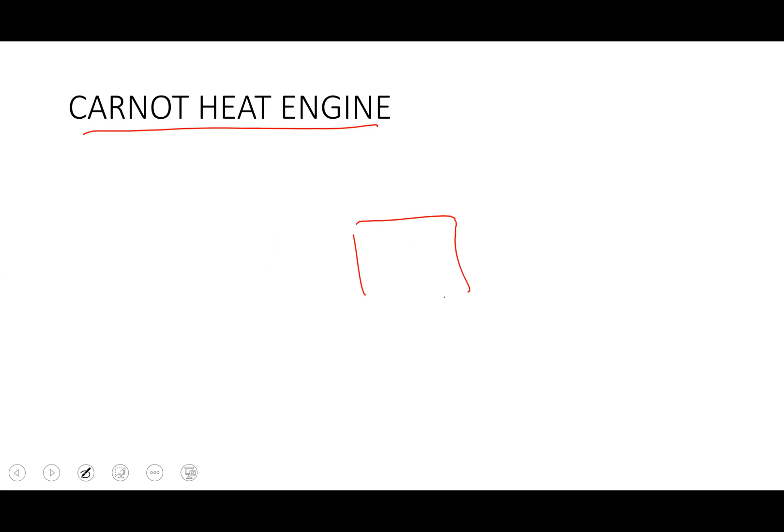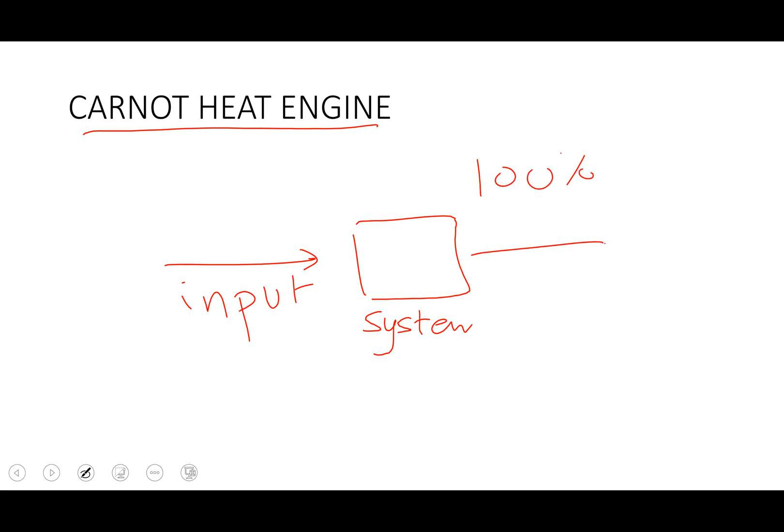A Carnot heat engine is basically a specific kind of engine in which whatever you put into the system as input, you get 100% as output, as useful work done. Such an ideal, or imaginary, engine is known as a Carnot engine.

Let us read about it. A heat engine is a closed system that exchanges only heat and work with its surroundings and operates in cycles. That means if this is a system, and we give heat to this system, it does two things: one is useful work done, and some of the heat is lost as heat loss, or friction, or heat sink.

All cyclic or heat engines derive heat from the heat source and convert some of it into useful work, which is this one, and reject the remainder to the heat sink, which is right over here.

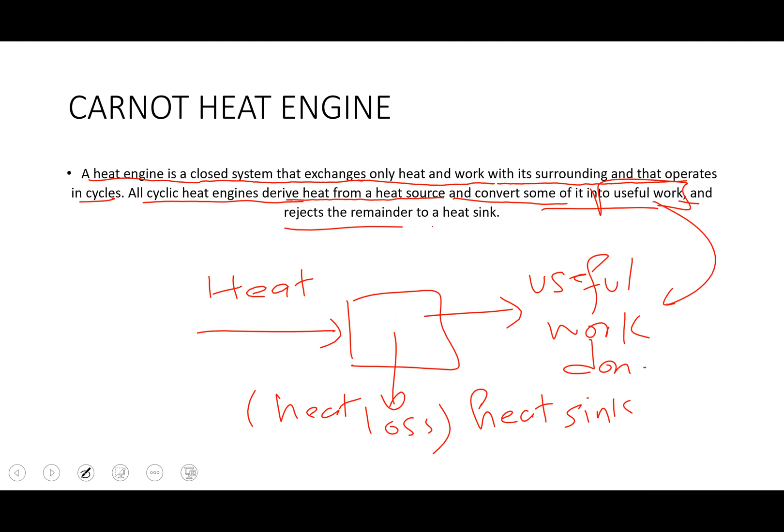As a matter of fact, all engines possess a dissipative effect. That means they will give off some heat due to friction, due to grinding between the materials inside it. Hence, the efficiency of the heat engine is reduced considerably.

In order to set an ultimate limit to the efficiency of the heat engine, a French military engineer named Sadi Carnot in 1824 considered a hypothetical, imaginary, idealized heat engine free from all sorts of heat loss and friction, which is called the Carnot heat engine. The efficiency of an actual engine is always less than the Carnot engine.

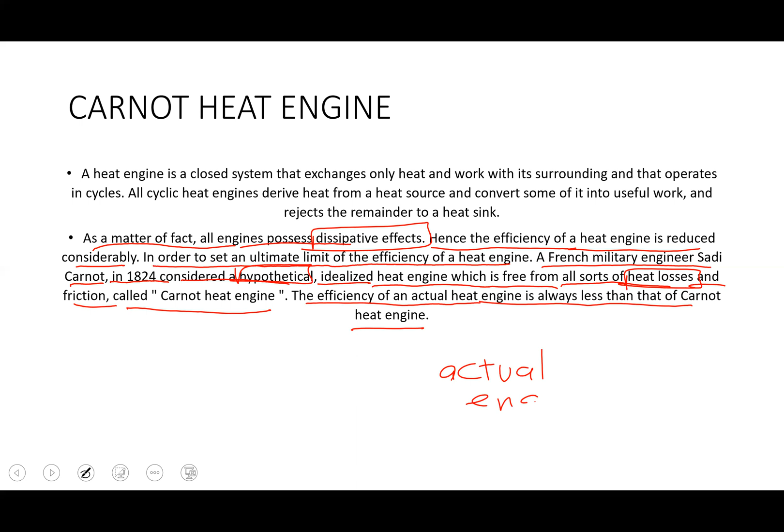So in an actual engine there must be grinding between the different parts of the machine, unlike in the Carnot engine. That is why you'll get more work out of the Carnot engine as compared to the actual engine. But this Carnot engine is imaginary, it's hypothetical.

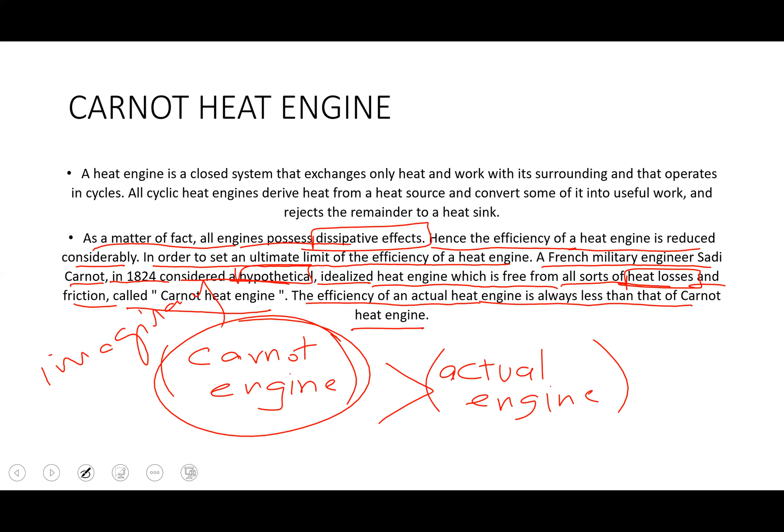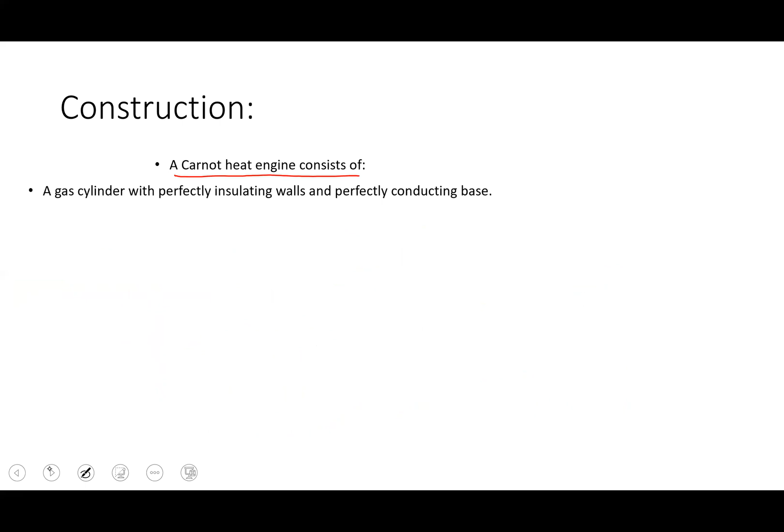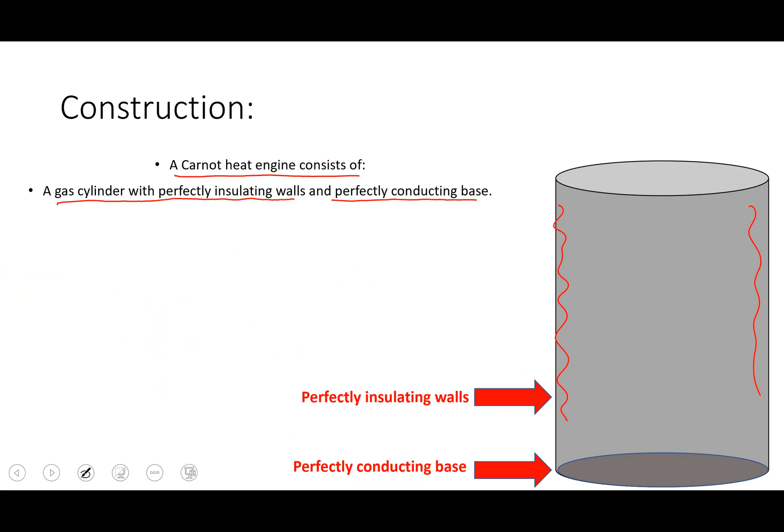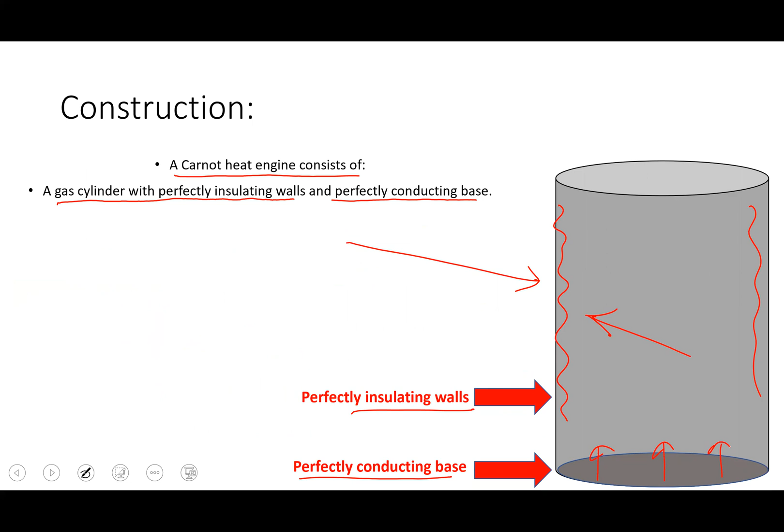Let us understand the construction of this simple engine. A Carnot engine consists of a cylinder with a perfectly insulating wall and a perfectly conducting base. So here's a cylinder and its walls are insulating, meaning no heat can get into or out of the cylinder. Whereas the base is conducting, meaning even if you send a little amount of heat into it, it will gather up that heat as well.

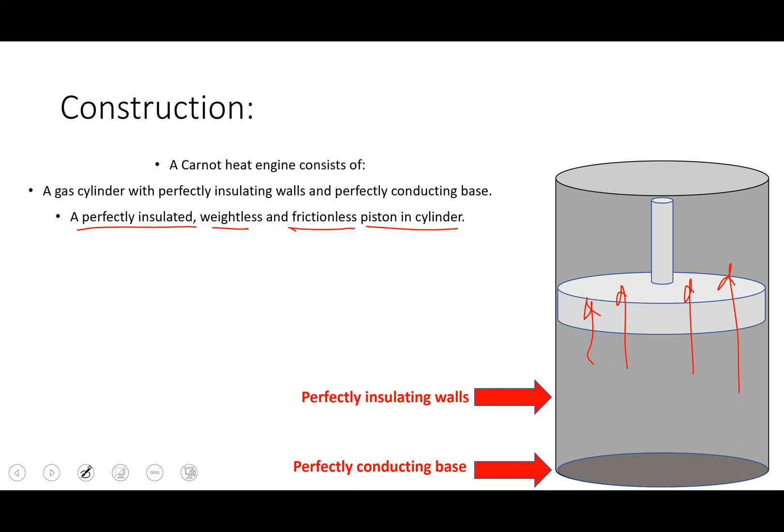A perfectly insulated, weightless, frictionless piston is in the cylinder. That means here's the piston and it is insulated, so no heat can get out of here. It is weightless, meaning it has considerably no extra weight, and it is frictionless, meaning no friction occurs over here. It moves like this.

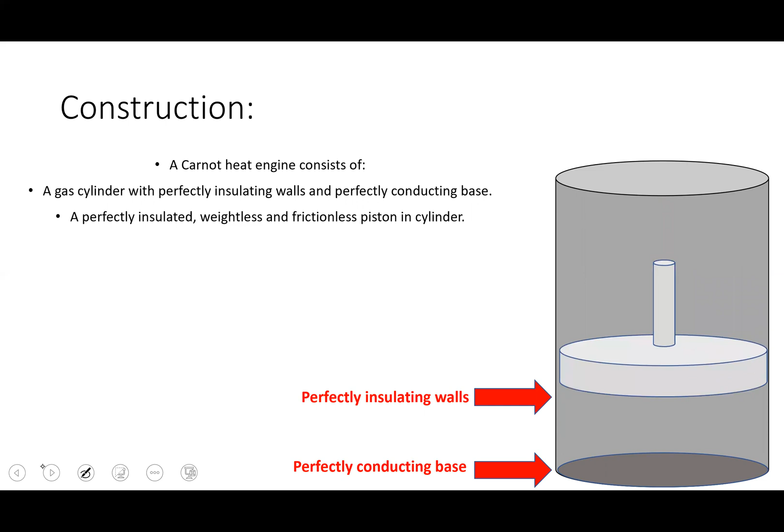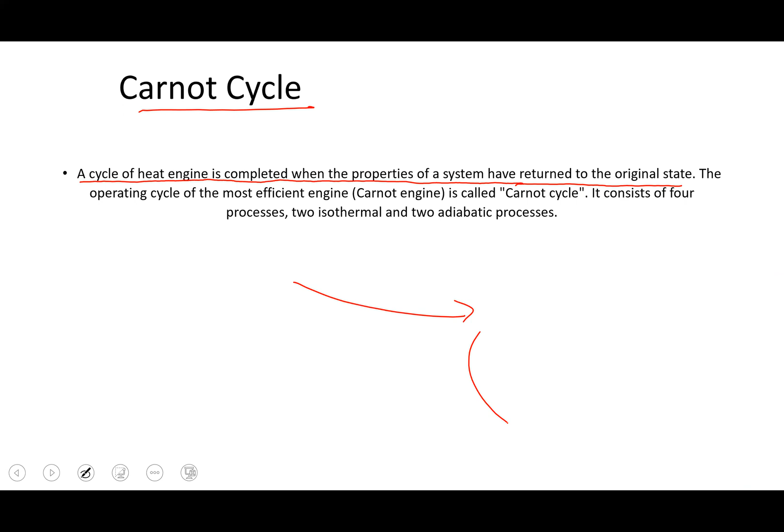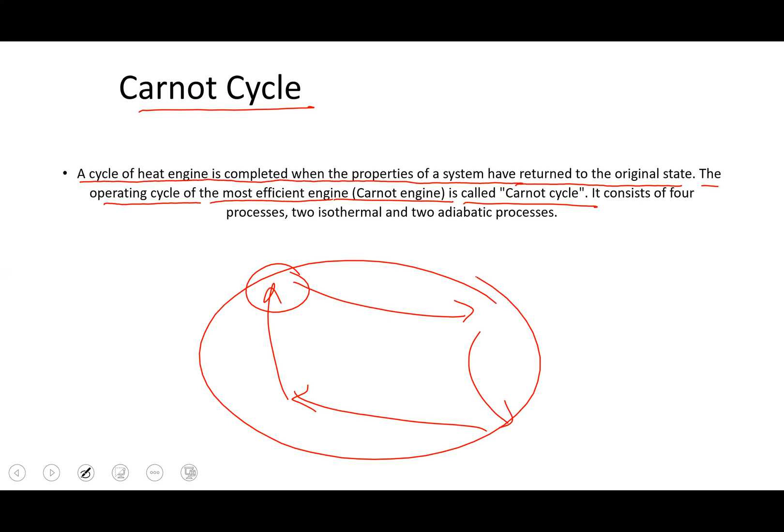Now, to understand the Carnot engine, we have to understand the Carnot cycle. A Carnot cycle, or cycle of a heat engine, is completed when the properties of a system have returned to their original state, meaning wherever it started from, it goes back to that original point. The operating cycle of the most efficient engine, the Carnot engine, is called the Carnot cycle. That means this type of cycle used in a Carnot engine is known as the Carnot cycle.

It consists of four processes: two isothermal. Isothermal processes are those in which temperature remains constant. As the pressure and volume change, the temperature will remain constant.

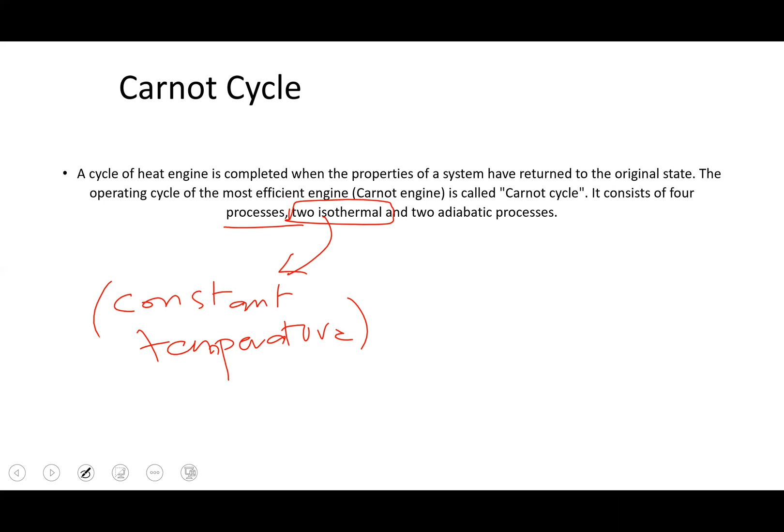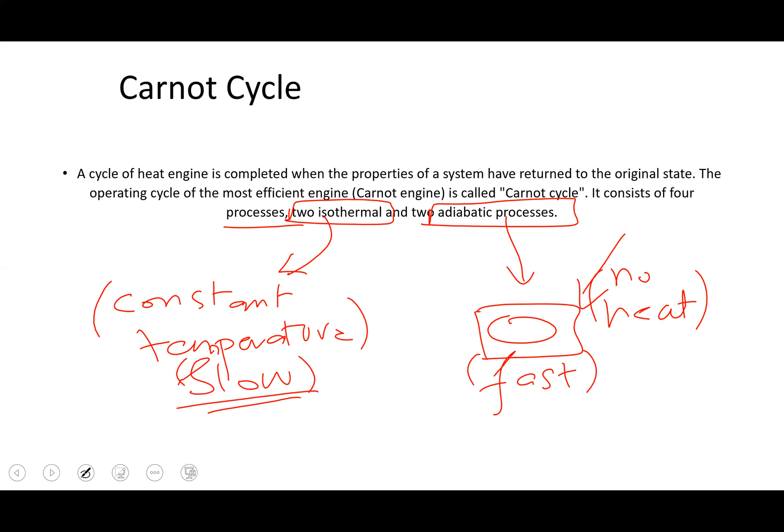The other two are adiabatic processes, those in which basically no heat is given to or taken from the system. Whatever goes inside it basically gives off or takes away heat very fast, a fast process, whereas in the case of isothermal, it is a very slow process. Keeping that in mind, fast and slow, we move on to the procedure now.

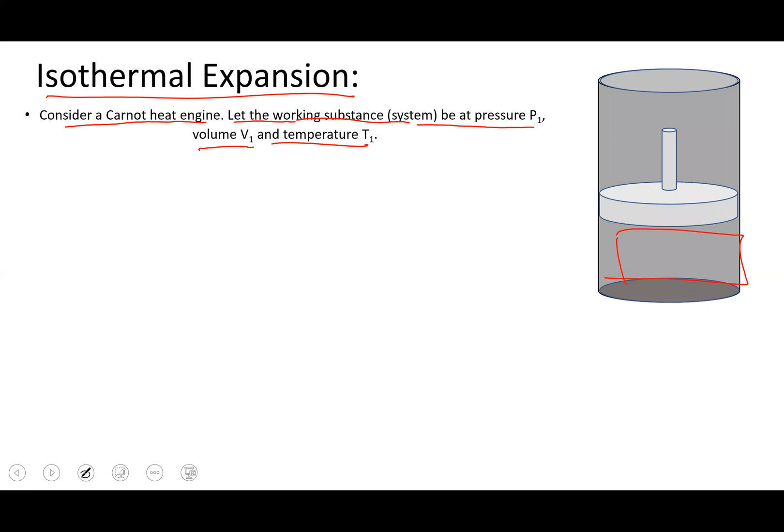Isothermal expansion. Now, in this case, we consider a Carnot engine. Let the working substance system be at pressure P1, volume V1, and temperature T1. So over here in the cylinder, or system, the volume is V1, the pressure exerted by the piston is P1, and the temperature inside is T1.

Let the gas cylinder be placed on a high temperature reservoir at temperature T1, and some amount of heat energy, plus Q1, is absorbed by the gas, keeping the temperature of the gas constant.

Now, as you can see, very slowly it begins to increase. We are decreasing the pressure very slowly. So first it was over here, and as you can see, it moves very slowly in the upward direction.

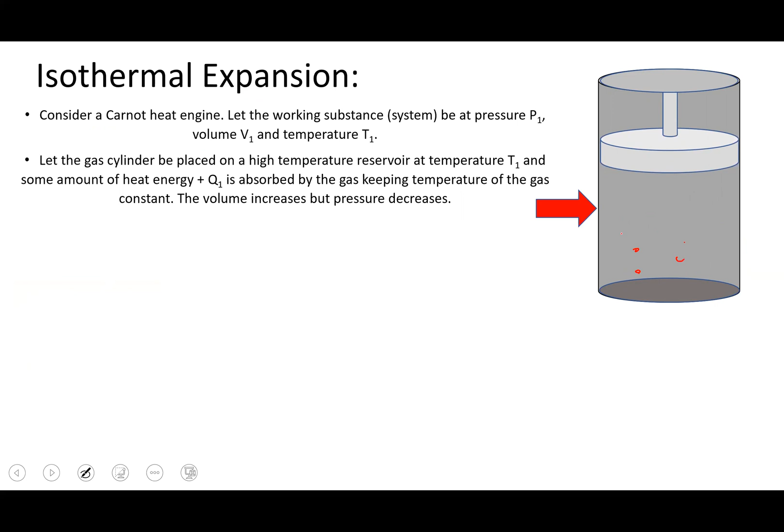Why is this so? Because the molecules inside it basically are colliding, but as they get more space, they will collide less. And the average kinetic energy inside this whole container will decrease because of the more space or volume. In this case, the temperature inside the container should basically decrease.

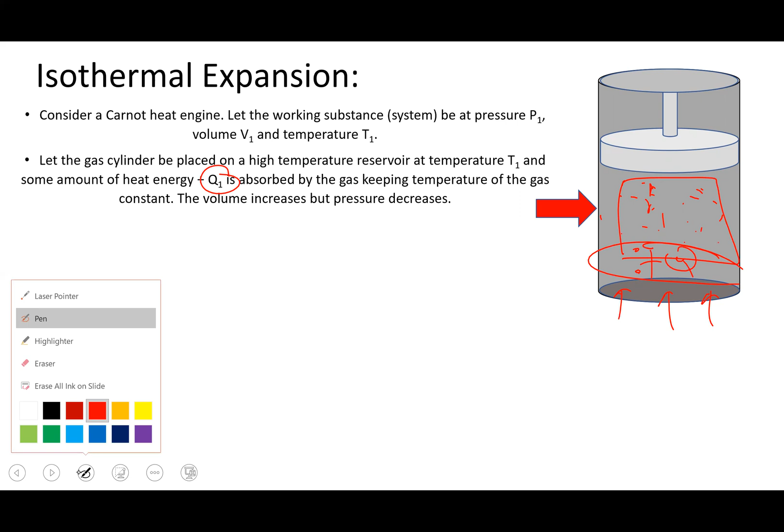But to remain at a constant temperature, it absorbs some heat. So that is why plus Q is written over here, keeping the temperature of the gas constant.

As you can see, the volume has increased, but the pressure has decreased. It was over here, it moved from here till here. So this much volume has been increased and the pressure basically decreases. The state of gas P1, V1, T1 changes to P2, V2, and T1.

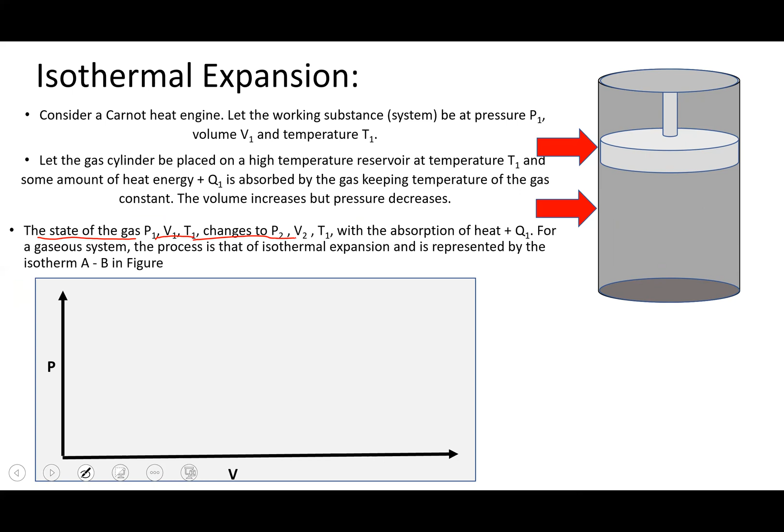As you can see, the temperature has not changed. With the absorption of heat plus Q1 for the gaseous system, the process is of isothermal expansion and is represented by isotherm AB in the figure.

Now this is a graph between P and V, where P is the pressure and V is the volume. So as we can see in this graph, the pressure P1 has decreased to P2, the volume V1 has increased to V2, but the temperature T1 remains constant, that is same. And this line is known as isotherm, which is AB, represented in the diagram.

To summarize it all, we say isothermal expansion in which P1 is greater than P2, because it was very close to over here, but it decreases. So P2 has decreased, so it is less than P1. V1 is less than V2, that means volume has increased, but the temperature is constant. In this case, temperature is T1.

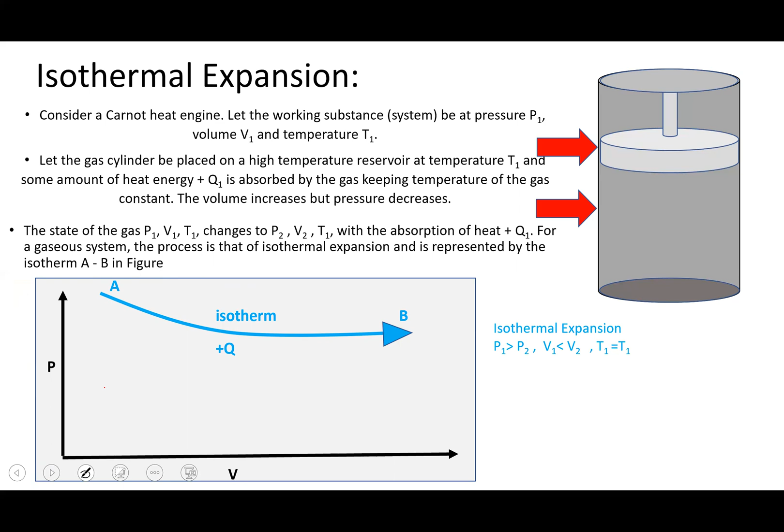Moving on with the same procedure is the adiabatic expansion. Now it has already gotten up to this point. Let us move this whole cylinder very quickly in this case, which is adiabatic expansion. The gas cylinder is now being placed on an insulating stand. That means we have placed it on material which does not give its heat or take heat from it, because the surrounding walls of this cylinder are insulated.

Then no heat enters the system or leaves the gas system. Now we know it is an adiabatic process. So as you can see, it moved very quickly in the upward direction from here till here. Here's the point.

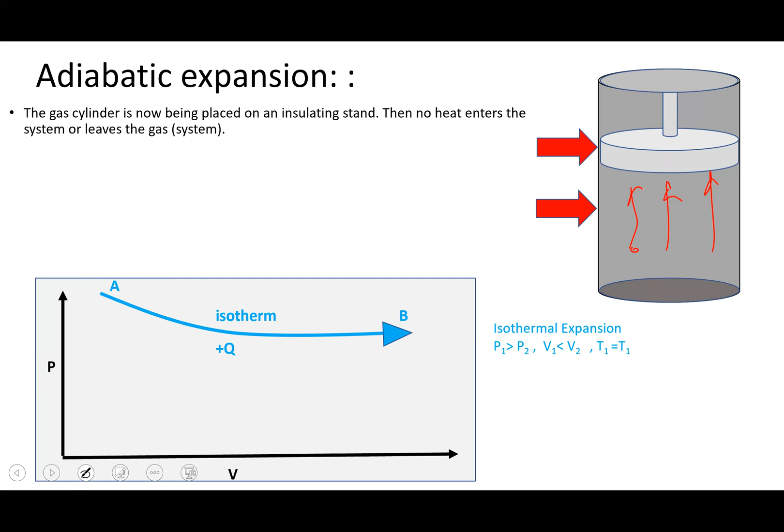So as it moved very quickly, molecules have more space very quickly. And due to that, there's a very rapid decrease in temperature. And because of that, we can see the rapid decrease in pressure as well. So here's the diagram in the figure, as you can see, but let us read about it.

Suppose the gas is allowed to expand till the volume increases from V2 to V3. Thus, the temperature falls from T1 to T2. That means temperature has decreased because of the increase of the volume suddenly. The pressure also decreased from P2 to P3. The process of adiabatic expansion along the adiabat BC is shown in the figure.

So this is B and this is C. As you can see, it is a very rapid process. It decreases very rapidly, and the temperature changes from T1 to T2. The pressure has decreased rapidly, and the volume, as you can see, has increased in this case.

Now, to summarize it in a line, adiabatic expansion in which P2 is greater than P3, V2 is less than V3, and T1 has changed now because the temperature has changed or decreased. In this case, temperature has decreased from T1 to T2.

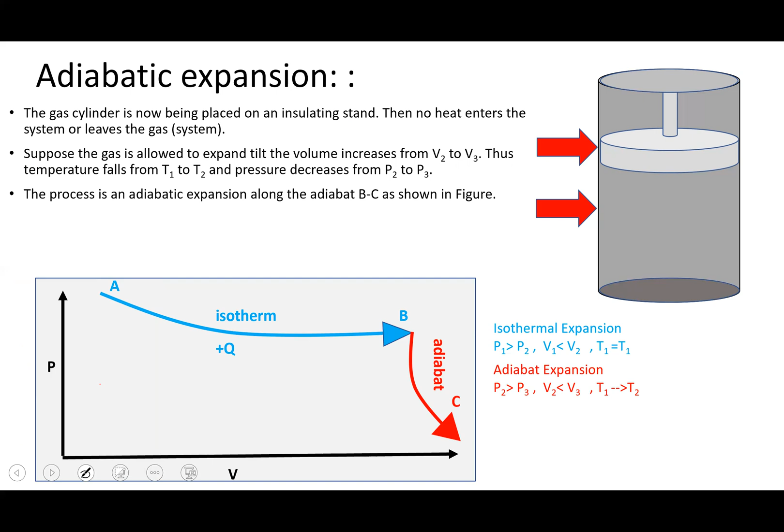Let's move on to the third procedure, isothermal compression. Now, in this case, we have to compress the piston. The gas cylinder Carnot engine is now again being placed at a certain object, which basically gives heat or takes away heat from its conducting base, then placed at a low temperature reservoir at temperature T2.

So let's place this piston over here. Because it is an isothermal process, it moves very slowly and gradually, and we push it down so that the molecules collide with each other but with very minimal velocity. Because of this, there's a little change in temperature, but we control that by taking heat from it using a cold reservoir. So heat is absorbed in this case, so that the temperature inside this container remains constant.

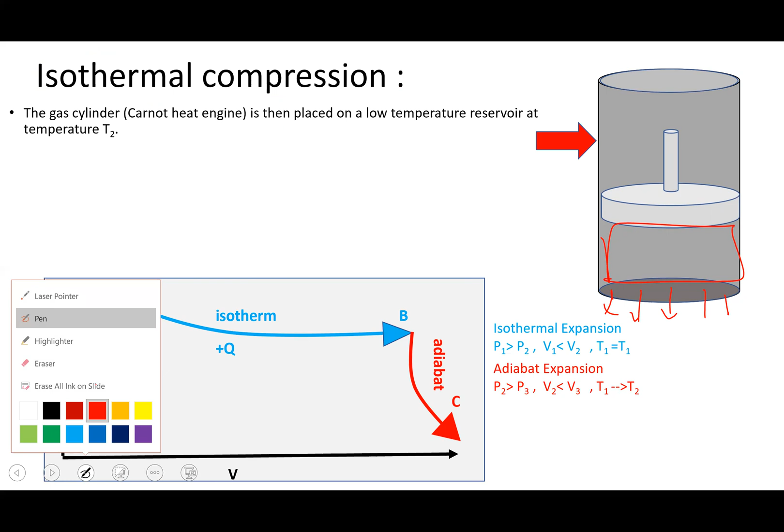So it moved from here till here. That means the volume has decreased, which means pressure has increased. Now the gas is allowed to compress by increasing the load on the piston, meaning we increase the pressure on the piston. The heat energy Q2 is negative, meaning we are taking heat out of this conducting base, which is rejected by the gas inside this container.

The volume decreases from V3 to V4 and the pressure increases from P3 to P4 at a constant temperature. This process is represented by the reversible isotherm CD, shown right over here. This is C and this is D. Here, heat is being rejected and the temperature T2 remains the same.

We can represent this simply as isothermal compression: P3 is less than P4, meaning the pressure here is less compared to the pressure here. The volume has also decreased dramatically - V3 is much bigger than V4. And T2, shown in blue, remains the same here and here because it's an isothermal process, and we let all the excessive heat out of this conducting base.

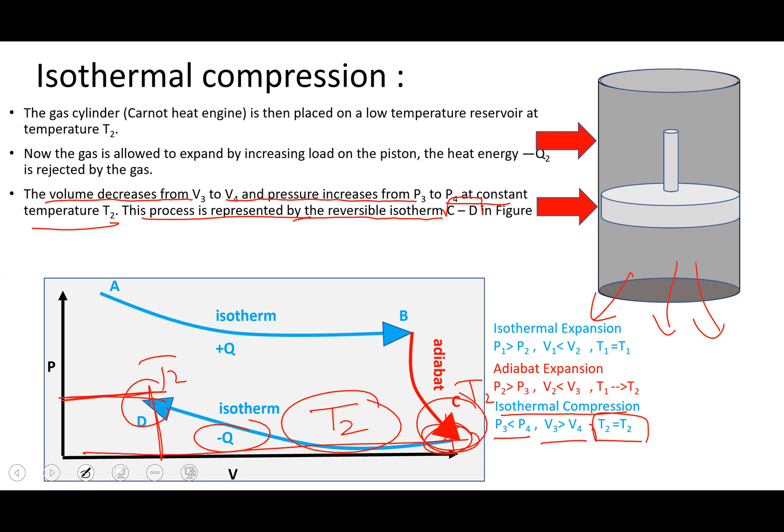Now for the last procedure: adiabatic compression. In this process, the same thing occurs but very rapidly. The gas cylinder is once again placed on an insulating stand, so there is no heat entering or leaving the system. We remove any conducting material underneath the conducting base, so that no heat can enter or leave the system.

And we place the piston over here like this. As you can see, it's a very rapid process. In this case, the molecules collide with each other very quickly, and because of that there's a rapid increase in temperature, which decreases the volume and increases the pressure inside the container. The gas is compressed adiabatically to its initial state.

That means it goes back to its starting point, just like in the ideal case. The gas cylinder returns to its initial state, which is P1, V1, and T1 for the gaseous system. This process is represented by the adiabat DA in the figure. This completes the cycle - it goes back to point A.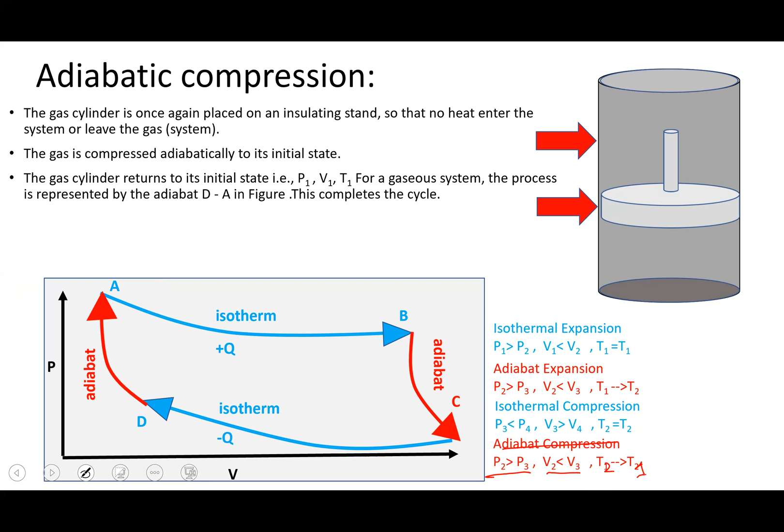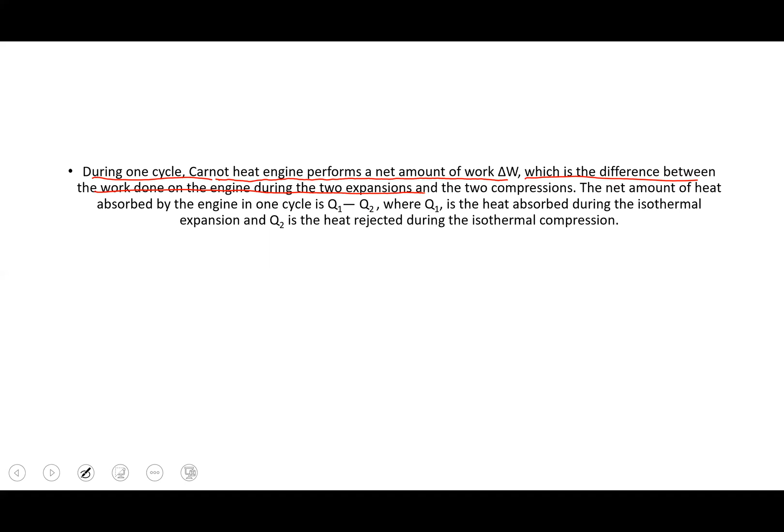Now, what have we learned? During one cycle, the Carnot heat engine performs a net amount of work done, delta W, which is the difference between the work done during the two expansions and the two compressions. The net amount of heat absorbed by the engine is Q1 minus Q2, where Q1 is the heat absorbed during isothermal expansion and Q2 is the heat rejected during isothermal compression.

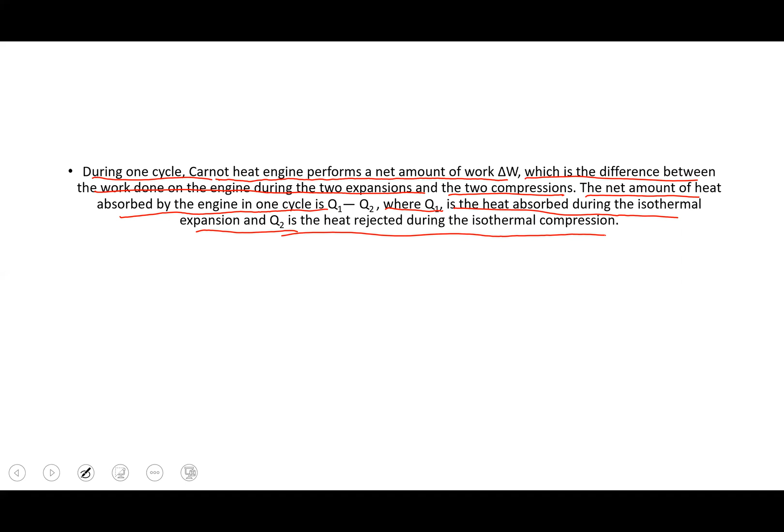The area ABCDA - that was A, this was B, this was C, this was D, and back to A again.

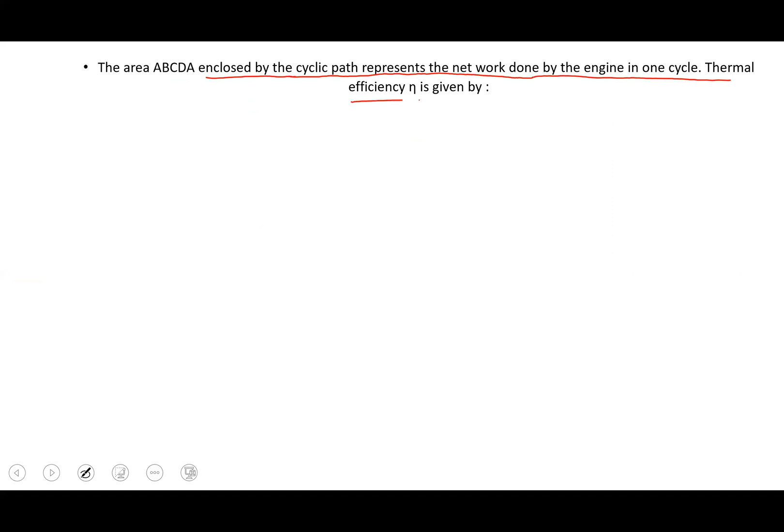The area enclosed by the cycle represents the net work done by the engine in one cycle. The thermal efficiency eta is given by output over input. Efficiency is equal to output over input. The heat supplied basically was Q1. The work done was delta W.

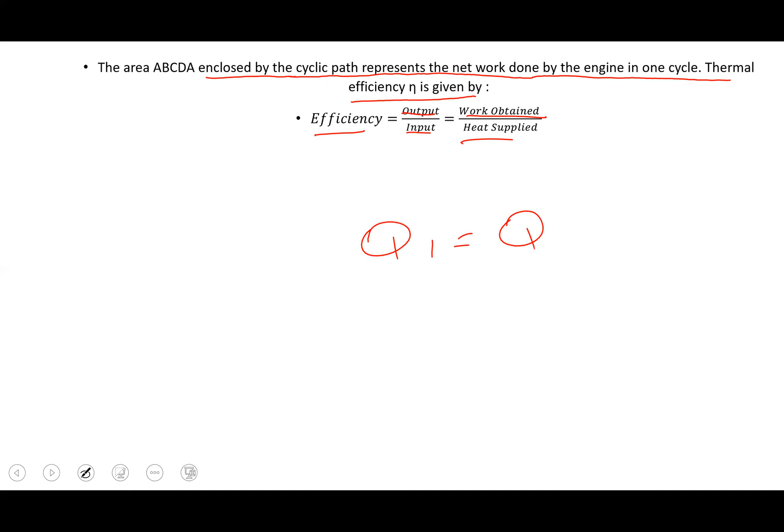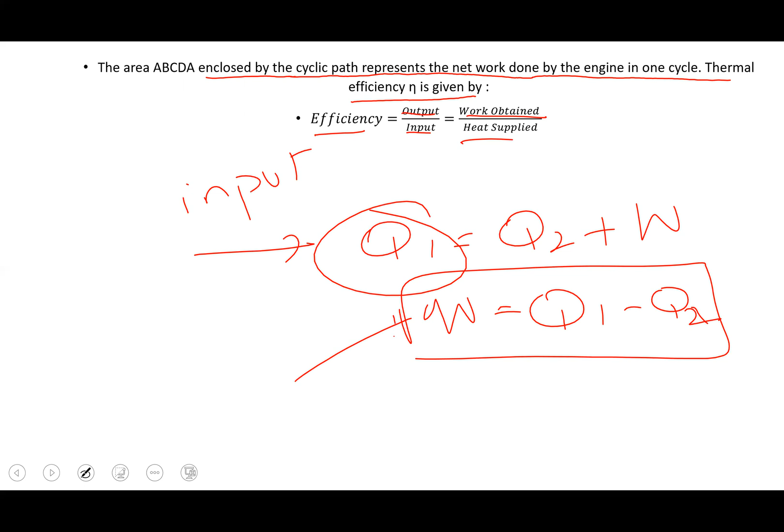So if we remember the first law of thermodynamics, the heat given is converted into two parts: one is the heat to the sink and the other is the work done. So the work done over here can be given as Q1 minus Q2. So this is the useful work done out of this whole scenario, and this is the input in our case. So Q1 is the input and W is the useful work output.

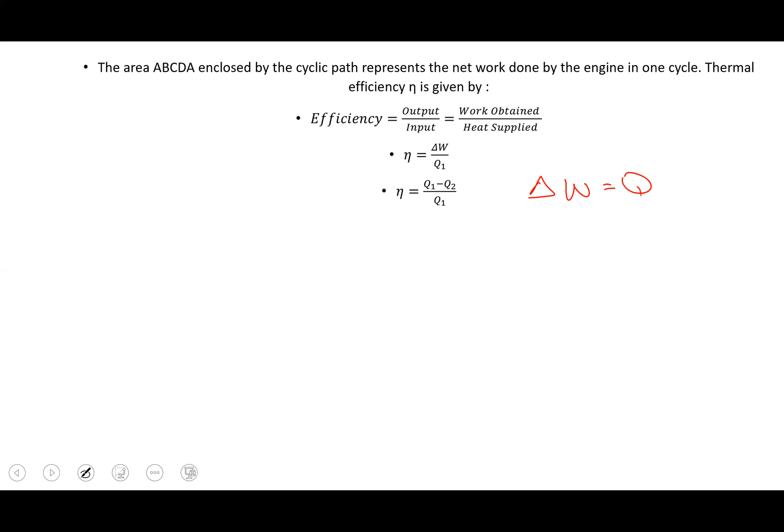So eta is equal to delta W divided by Q1, and we can represent delta W as Q1 minus Q2. So now we are going to solve this equation. Eta is equal to Q1 minus Q2 over Q1. We can write it down separately: Q1 over Q1 minus Q2 over Q1. Q1 cancels out, so it will be 1 minus Q2 over Q1. So this is a simplification of eta. Let me remove this non-equal sign.

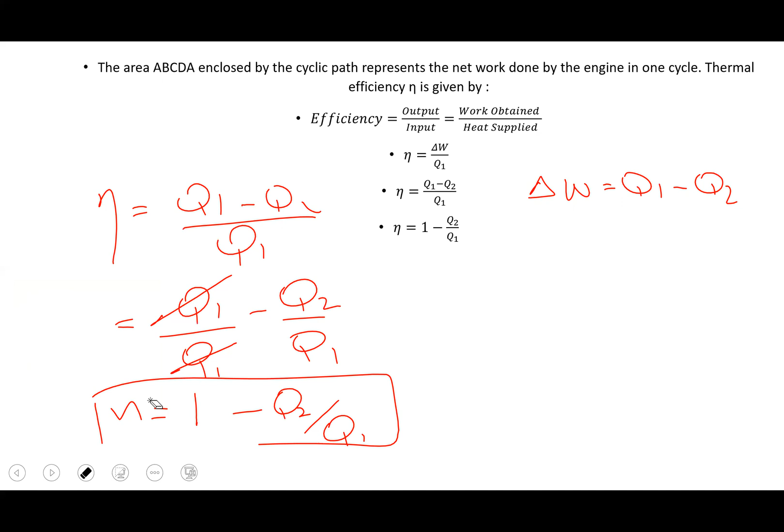We know that the absolute temperature of an ideal gas is directly proportional to the average kinetic energy of its molecules. That means as the average kinetic energy of the molecules increases, the collisions between the molecules increase, so will the temperature. So they are directly proportional. Q2 over Q1 is equal to T2 over T1, where T2 is the temperature of the heat sink and T1 is the temperature of the source.

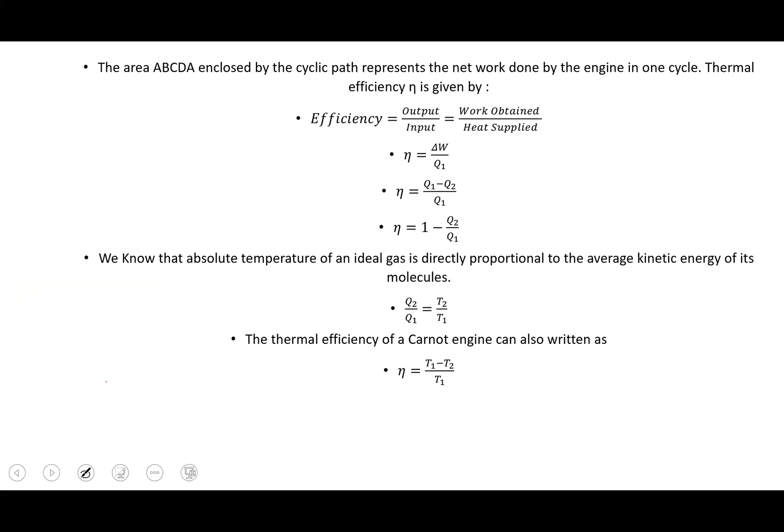The thermal efficiency of a Carnot engine is also written as eta is equal to T1 minus T2 over T1, and the same procedure applies. Eta is equal to T1 over T1 minus T2 over T1. We cancel this one, so it will be 1 minus T2 over T1. So this is the equation for temperature as well, which we can use in numerical questions. So these are the two equations we have formed from the Carnot engine.

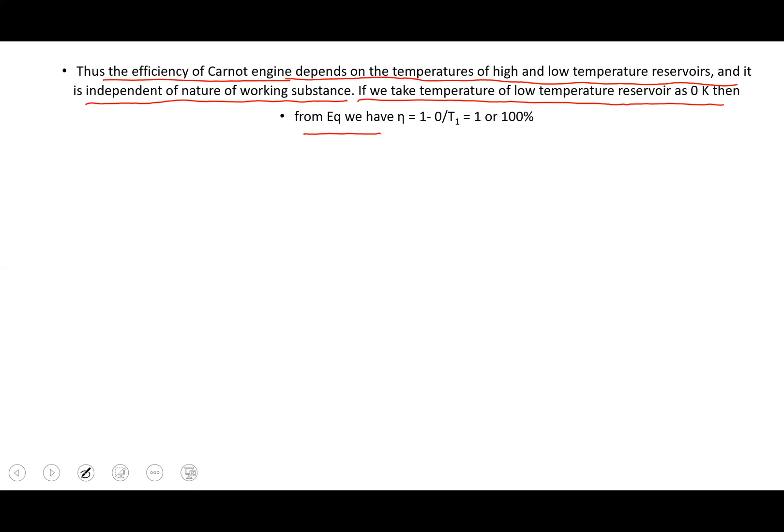Now, what we have observed is that the efficiency of a Carnot engine depends upon the temperatures of the high and low reservoirs, and not on the nature of the working substance. If we take the low temperature reservoir at 0 Kelvin, then the equation will have 1 minus 0 over T1, so it will be 100% because this whole term will be equal to 0. So the efficiency will be 100% in the case of the Carnot engine.

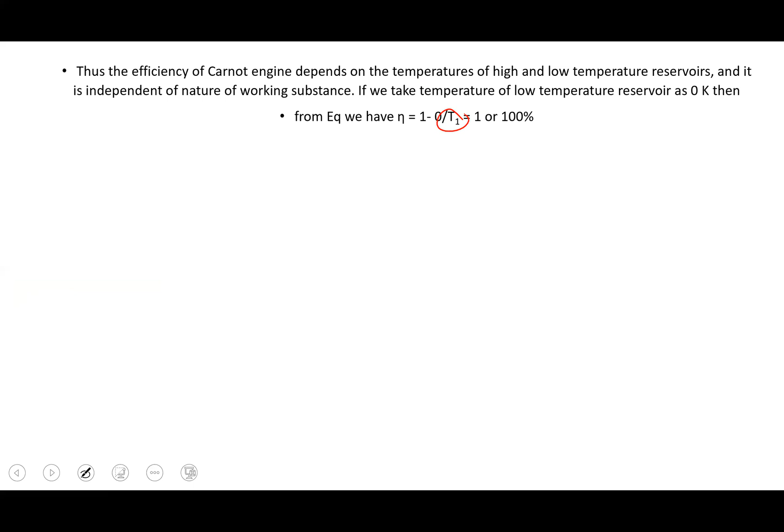It means the work done by the Carnot engine is equal to Q1. All the heat absorbed by the heat engine is converted into work, and none of the heat is lost. Again, this is against the Kelvin statement, which says some of the heat has to be lost to the environment. That is how it actually happens. By the second law of thermodynamics, it is not possible to achieve absolute zero. That is why the Carnot engine is not possible in the actual world.

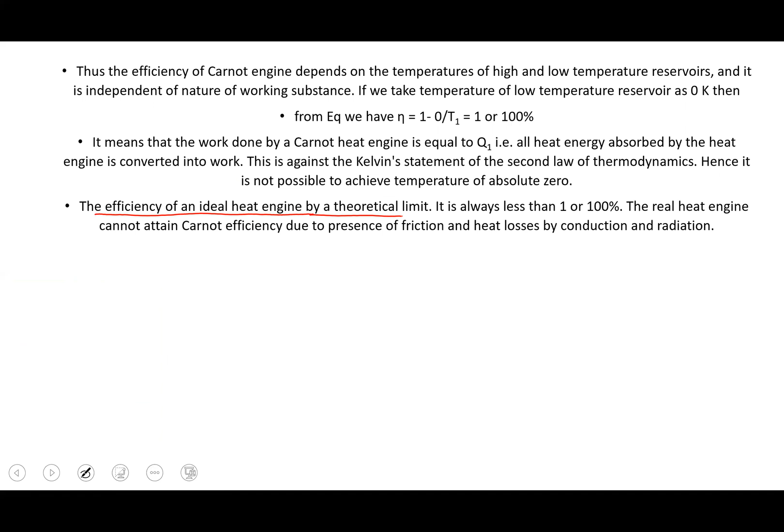The efficiency of an ideal engine is a theoretical limit; it is always less than 1, or 100%, because we can't get a totally frictionless machine. A real heat engine cannot attain the Carnot efficiency due to friction and heat loss by conduction and radiation. Carnot deduced from these studies that no engine could have 100% efficiency.

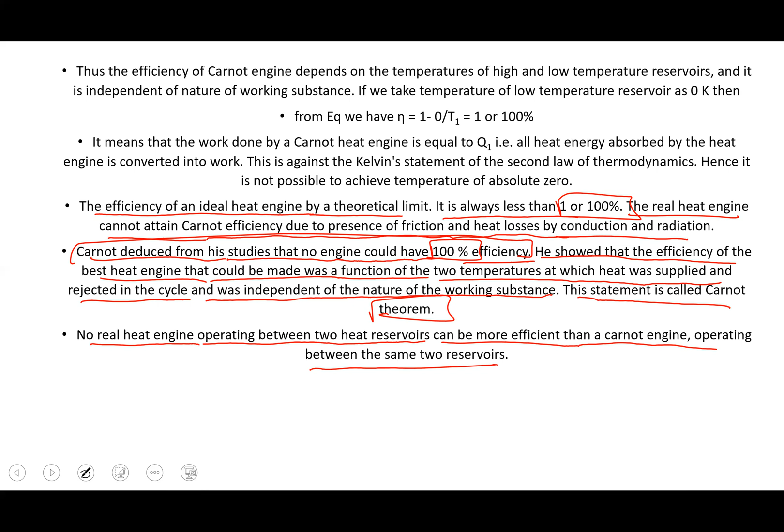He showed that the efficiency of the best engine that could be made was a function of the two temperatures at which heat was supplied and rejected in the cycle, and was independent of the nature of the working substance. This statement is called Carnot's theorem. No real engine operating between two heat reservoirs can be more efficient than a Carnot engine operating between the same two reservoirs. No engine converts all of the heat energy into work; this is not possible in the real world.